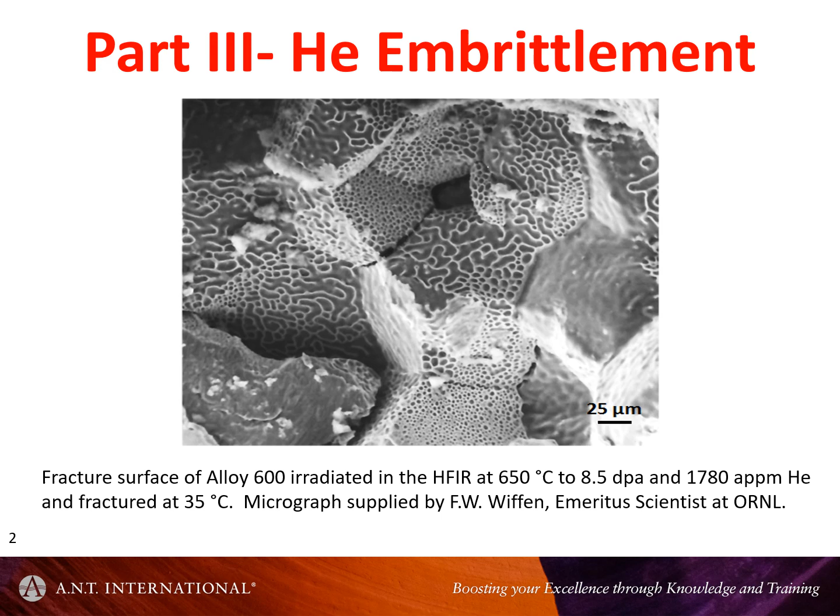Okay, so here's an example of helium embrittlement, from Fred Wiffen, Oak Ridge. Nickel alloys are particularly prone to helium embrittlement because they contain nickel. And nickel in a highly thermalized reactor will produce a lot of nickel 59 from the most abundant isotope, which is nickel 58. And nickel 59 is a very unusual isotope in that it has a very high cross-section for helium production, as well as protons and hydrogen production, and then gamma reactions. So on all counts, getting nickel 59 produced is not good. Fortunately, it kind of saturates at around 3% of the total, depending on the burn-in and the burn-out rate and what the spectrum is.

So when we discovered we had a problem with Inconel X750 spacers, one of the reasons I was particularly interested is because when I was just starting at AECL as a young person, I was given the job of doing a surveillance assessment for some flux detectors removed from a CANDU reactor. Ultimately, many years ago, flux detectors were exposed to moisture from the vault, and they realized that this was bad because you'd get nitric acid being produced with all the gamma radiation around, and early flux detectors in CANDU reactor designs were failing because of nitric acid attack. So then they encapsulated them in helium-filled tubes that went right through the reactor.

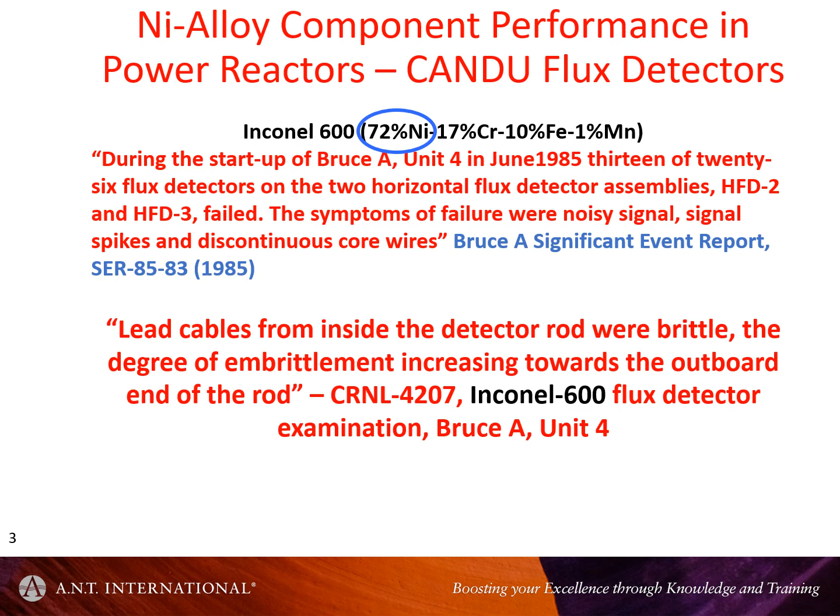But even then, after about 5 or 6 years, they would break during startup, and ostensibly you could just replace them. But just by routine, there'd be a bit of a surveillance examination just to make sure it was nothing unusual. But it was unusual. These things were very brittle, and you couldn't attribute it to nitric acid attack. So that was my first introduction to the peculiarities of Inconel components.

So the CANDU reactor runs on natural uranium, has a very high thermal flux because of that, and therefore can operate and generate fission. And neutron economy is very important. So anything which is nickel or steel in the core, even though the calandria vessel itself is stainless steel, anything in the core is minimized. The amount of mass in the core is minimized. Springs are tolerated because nickel alloys are good springs. And flux detectors are also tolerated because they can be taken out after a short while. They can be easily removed, but they'd only last for 5 or 6 years.

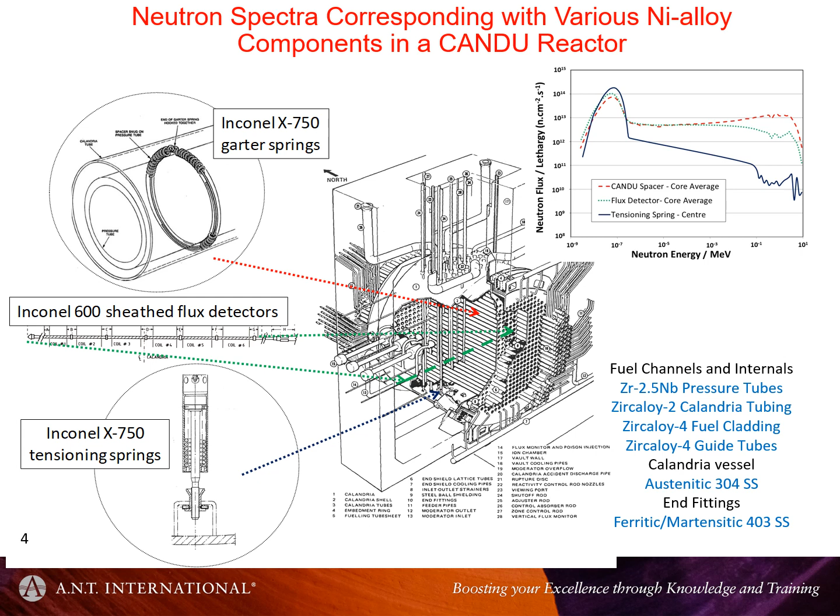At the edge of the core, there are these tensioning springs, and that's another story. They have some very interesting effects as well. So what I saw when I just started work at CNL was that, being responsible now for the surveillance program of these flux detectors, it was very clear that there was something to do with the temperature. So basically they were encapsulated in a zirconium alloy tube, but obviously the helium gas was released at some point. It's funny, being helium,

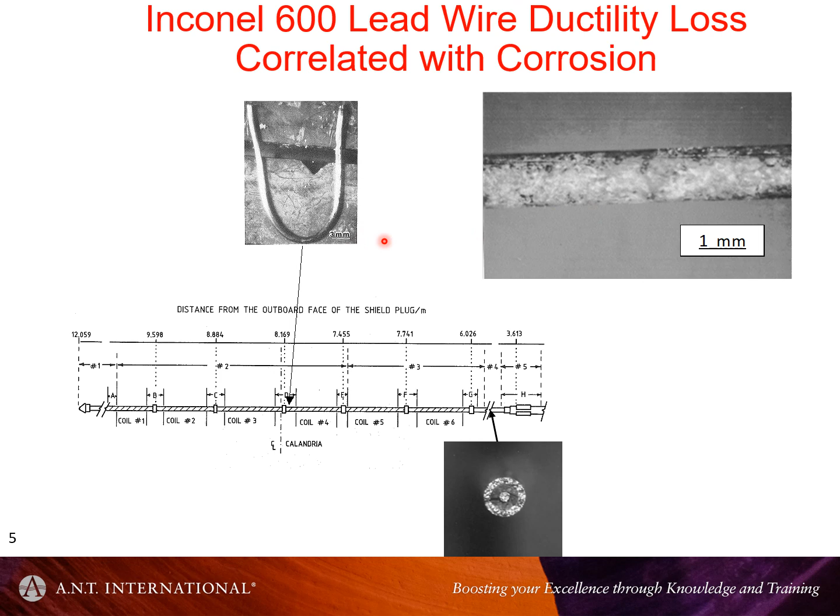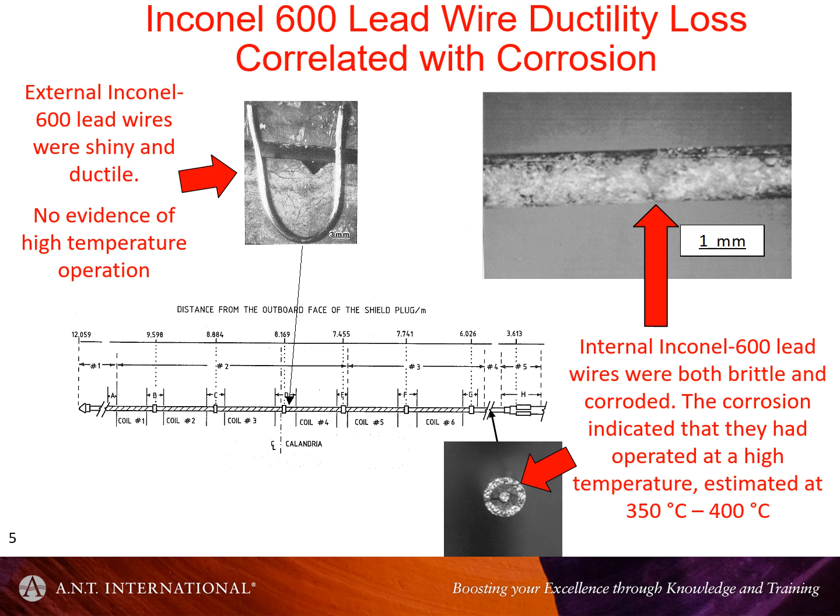but also they just leaked out, replaced by air. Air is not as good a conductor, and these things got hot. And what I saw is they were very brittle in regions of the reactor where there was a lot of mass concentrated, a lot of temperature, and they corroded as well at the same time. So it turns out the corrosion layer was itself very odd. But the components which are outside of the rod, but also at the peak flux in the middle of the reactor, were quite ductile. So in that case, it seemed like it wasn't an irradiation effect. It was something synergistic with temperature, and clearly temperature was very dominant.

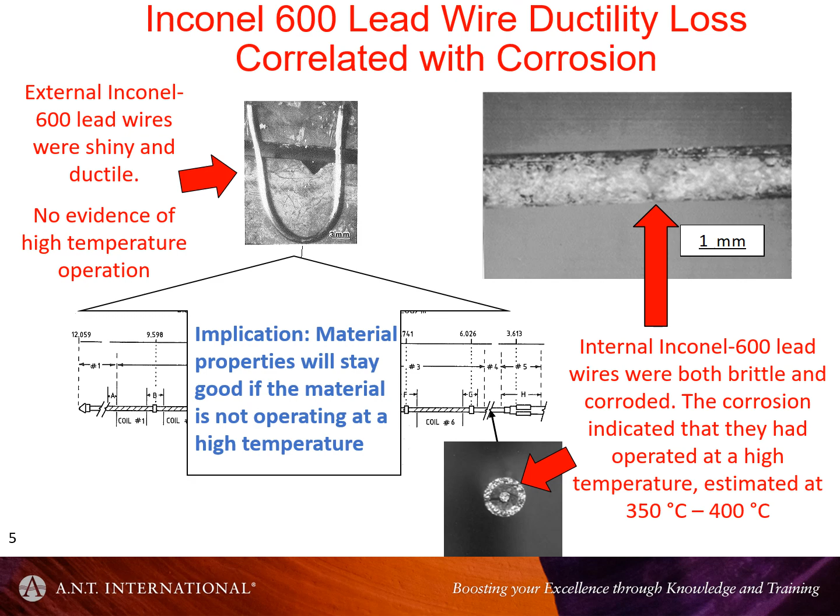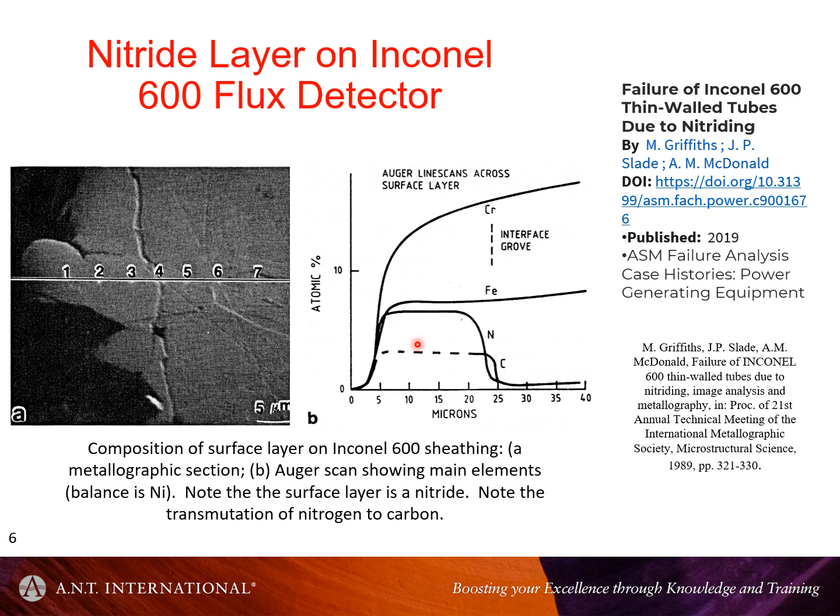So the implications were the material properties would stay good if it weren't operating at a high temperature. I mentioned there was a corrosion layer on these detector components, the Inconel 600 in this case, where they were hot, and it was a very high nitrogen layer, so you're reacting with the nitrogen in the air. What was interesting is also this carbon layer mixed in there, and that comes from the transmutation of the nitrogen to carbon. So one of the things that was clear is where the properties were bad, where these things were very brittle, there was this thick layer.

And being naive and young, I said, well, okay, it's brittle where you have nitrogen layers. So we wrote a paper to do with the embrittlement due to nitriding. The idea was that the brittle layer would crack easily because it can't deform, and you've got this high stress if you bend the thing, the outer fiber stress in this layer, and if the crack intersects with a grain boundary, it will then progress further. Again, this was a bit of naivety, but I didn't have much money to proceed further and do an in-depth study. Certainly didn't have the facilities to look into this in more detail, although I wanted to, but nobody was interested.

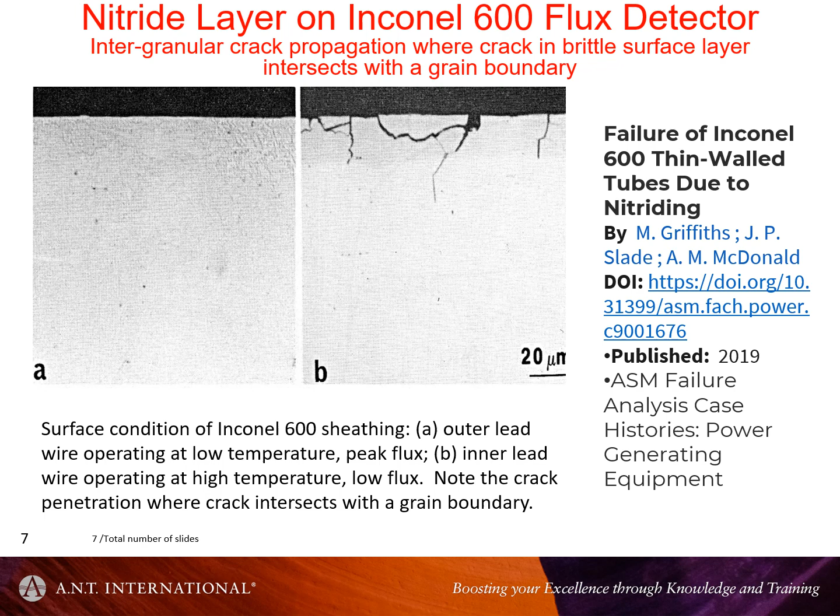So this relationship with cracking of components has been popping up quite a bit. It also happens in PWRs. Another Inconel 600 component, there was an operational experience report back in 2006, where a flux thimble was being pulled out of the Surry reactor, and the report described it as shattering into 6 pieces. Very interesting.

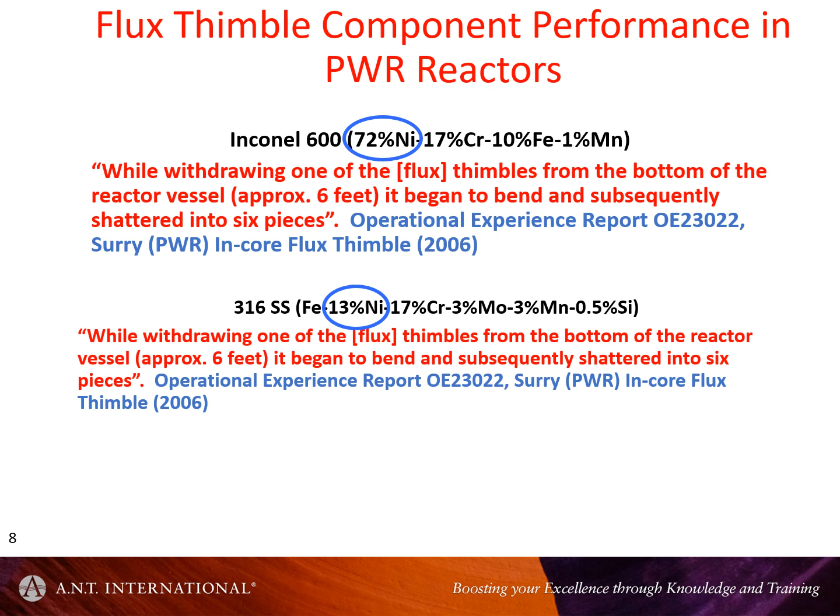More recently, in the 2000s, people have been studying 316 stainless steel tube. What was observed, this is some work by Fujimoto and Edwards. They actually did do some TEM, and they were able to show that there were bubbles concentrated along grain boundaries, and corresponding with that, there was some embrittlement, some intergranular failure. Now, they're still kind of cautious about attributing that to helium, but they said it could be.

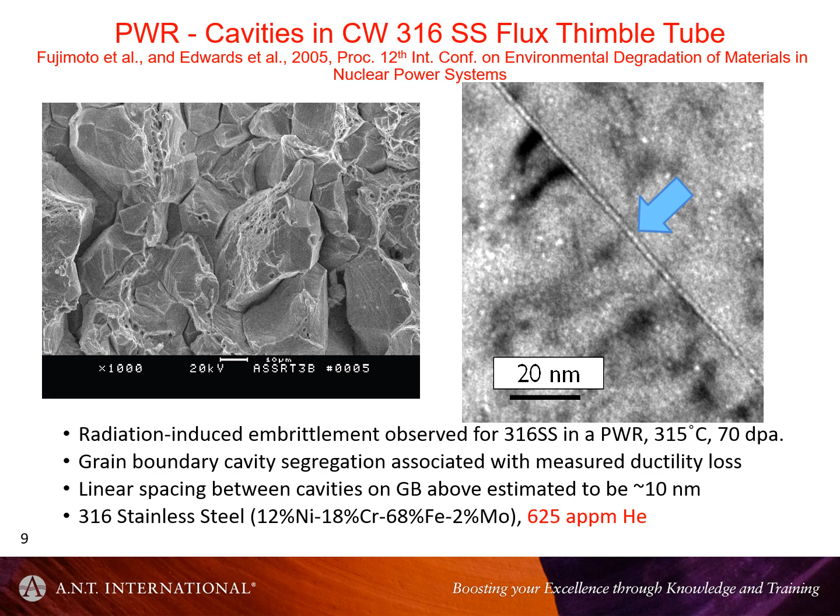At that time, this was the first instance where somebody had observed very small helium bubbles, certainly segregated at grain boundaries, in a PWR environment. So this is stainless steel. It's only 12%, 13% nickel, so you don't get an awful lot of helium. Plus it's a PWR spectrum, so it's not like CANDU, but enough to get this segregation. And people hadn't noticed it before in any other previous TEM studies of stainless steels.

And Danny Edwards at the time kind of attributed this to the fact that people hadn't defocused the TEM. To me, that was kind of an odd thing to attribute the lack of observation to, because having spent tens of thousands of hours in an electron microscope, I know for a fact that you're defocusing and focusing and over-focusing left, right, and center whenever you're trying to find that focal point. So this should have been obvious in many cases.

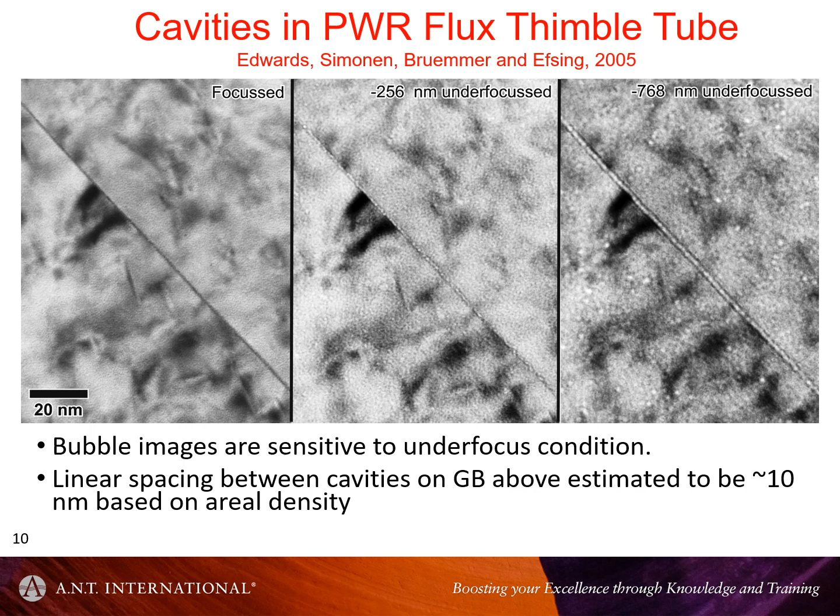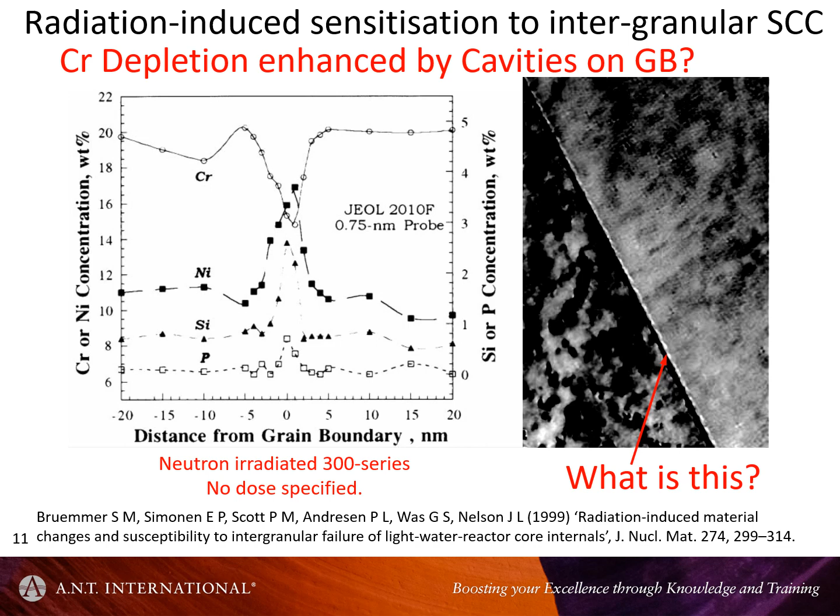And then it became apparent to me, when you look at that, and then you look at other past observations, in this case some work by Steve Bruemmer, and you look at the images that went with chromium depletion at grain boundaries, you have to be scratching your head and say, well, what is this? It almost looks like you have a string of helium bubbles, just like the Danny Edwards case, along the boundary. Doesn't look right. It looks like it's shifted somewhat, and the contrast is peculiar. But again, if you're familiar with electron microscopes, shifts in images depending on the height are okay. You expect that, and the thing to do is to align the microscope well.

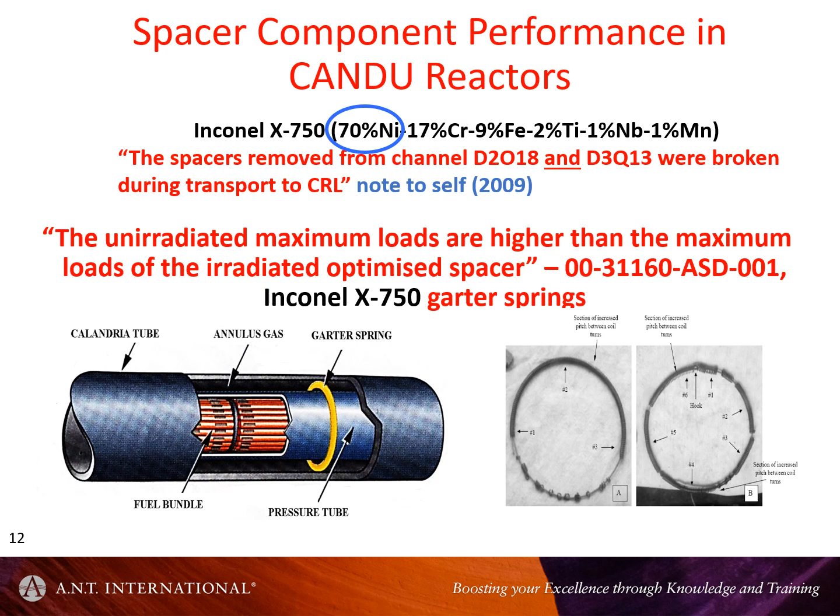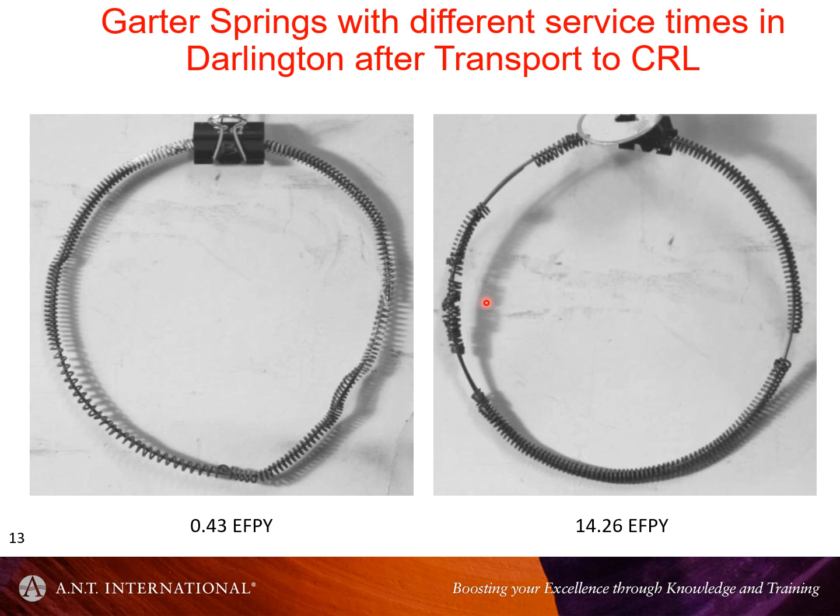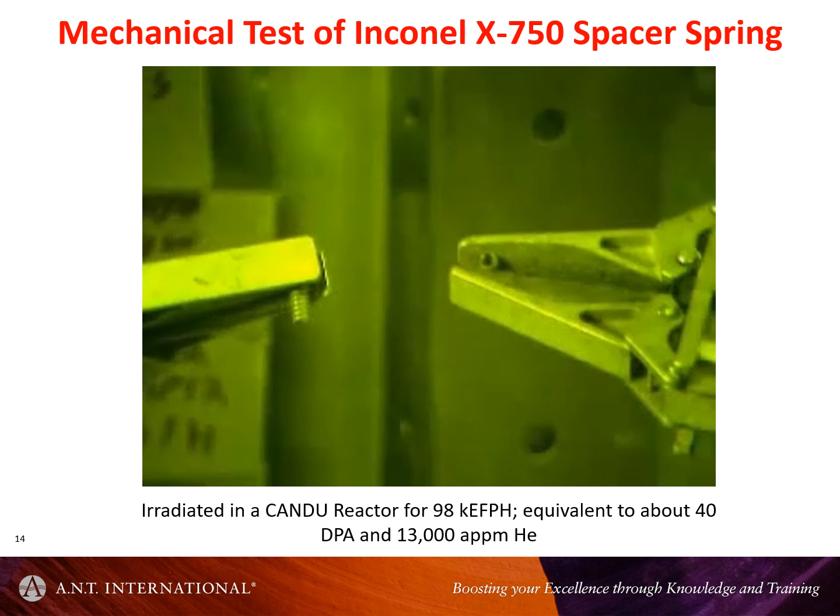I mentioned that in the late 2000s, we had these problems with spacers, and what we were seeing was that when the spacers were removed from service, they were coming to the lab in bits. This is an Inconel coiled spacer. It gets damaged in transit, banged around, but even though it's been irradiated, in this case about 1 dPa at that time, just a bit more, it's still ductile. It's only after a very high irradiation or much longer time in the reactor that it becomes very brittle. Take a piece of this in the cell, and it just shows you how easy it is to break. So something is embrittling them, obviously helium.

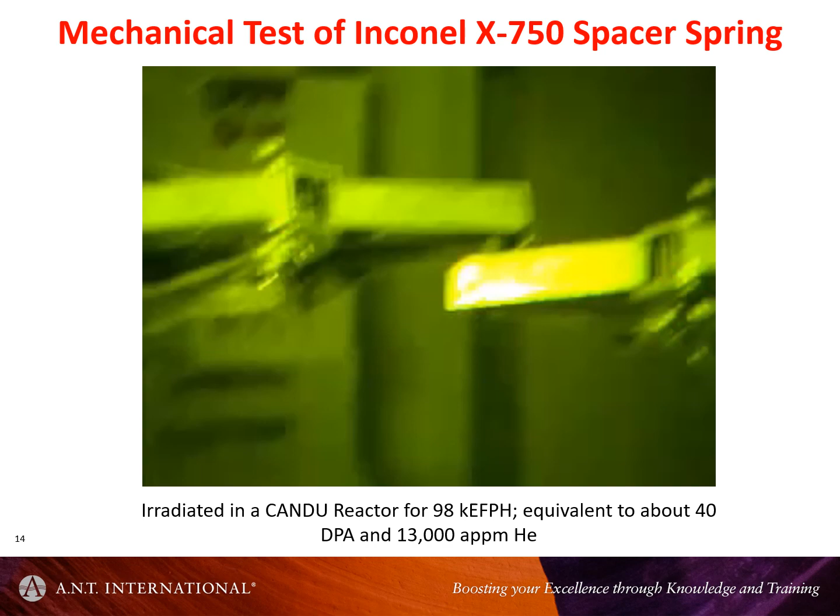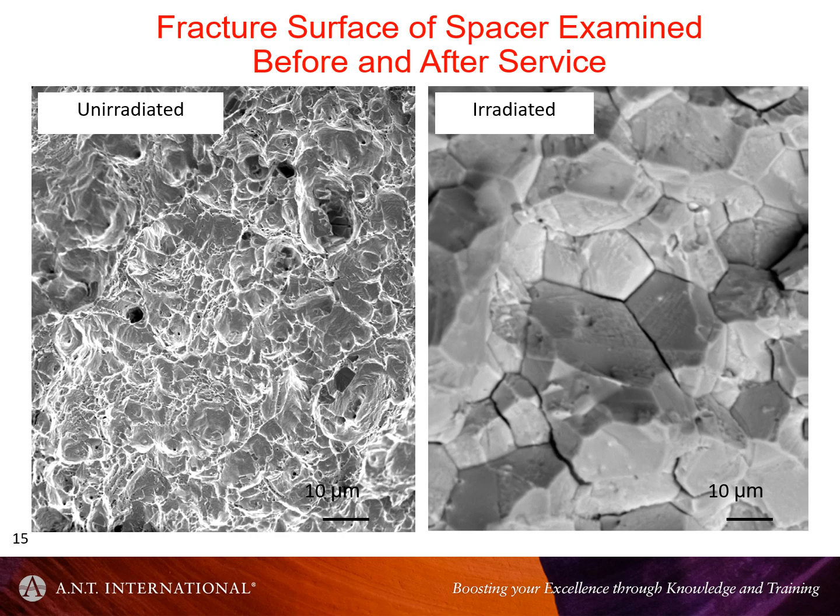When the material failed, I mentioned they failed along grain boundaries. So you had this classic intergranular failure of these spacers irradiated for a long time, whereas they would be ductile if unirradiated.

One can summarize the properties of these springs from results of crush tests. Their role, their function in the reactor, is to hold up the fuel channel. So long as they can withstand the pressure from the fuel channel, that's okay, as long as they have enough load carrying capacity.

What we're seeing, if you look at the unirradiated material, is the load displacement curve. When it's irradiated to about 5-6 dpa, the strength goes up and the ductility drops a little, as you'd expect. But with increasing dose, the strength goes down a lot. This is a big concern for the CANDU industry, because will it keep going down?

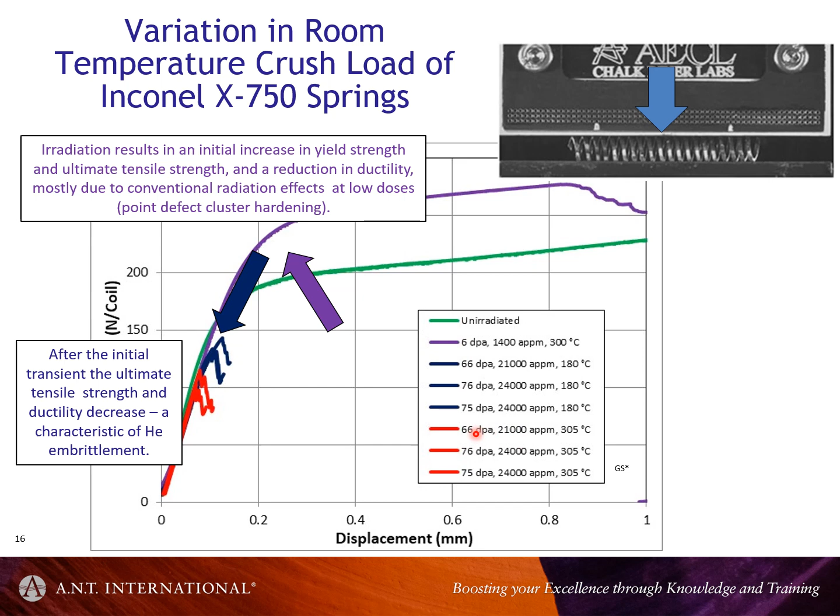The other interesting thing is that there's a temperature difference. I mentioned the flux detectors had this apparent temperature dependence of the embrittlement, and it seems that was probably not nitride cracking, but really helium embrittlement. What you see is that at a higher temperature, shown in red, the embrittlement is worse compared to the lower temperature.

Irradiation results in decreasing strength and ductility with increasing dose, and once you get past a certain low dose, the degradation just keeps dropping, as you see here.

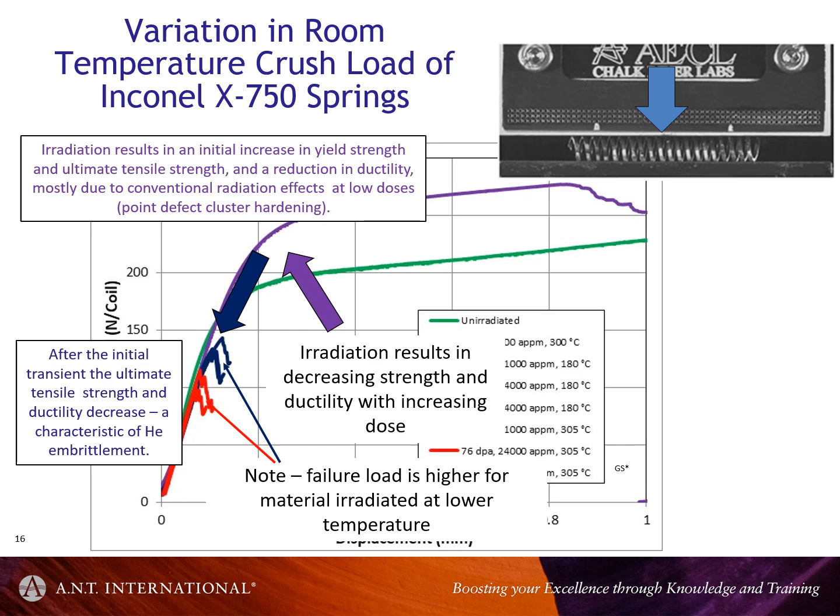One of the things I did as a program manager at Chalk River was say, well, we must do some TEM. We didn't have any sophisticated FIBs at the time, but we did have electropolishing equipment, and very good technicians who built a twin-jet electropolishing setup to polish these 1 millimeter wide sections of the spacer.

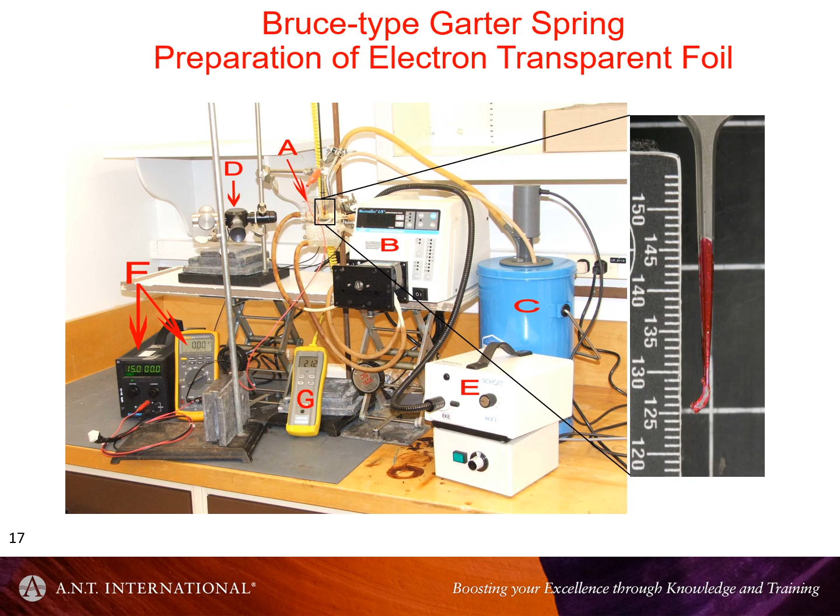I mention this because I was in my office one day when the guys had prepared the samples, and they called me over because they said, what you thought you would see, we don't see it. I had some young people just starting out, with no experience on the TEM.

They were quite mocking, basically, when I came over, saying you don't have the bubbles on the grain boundaries. So I said, let me sit down. I spent half an hour aligning the microscope, and then produced these two images here.

Basically, you've just got to align the microscope. The difficulty, and why people often weren't seeing it in the past, I think, is because they didn't have the microscope aligned. One of those young chaps, or a couple of them actually, went away and published this later without giving any acknowledgement to the fact that I was the one who aligned the microscope for them and took the pictures.

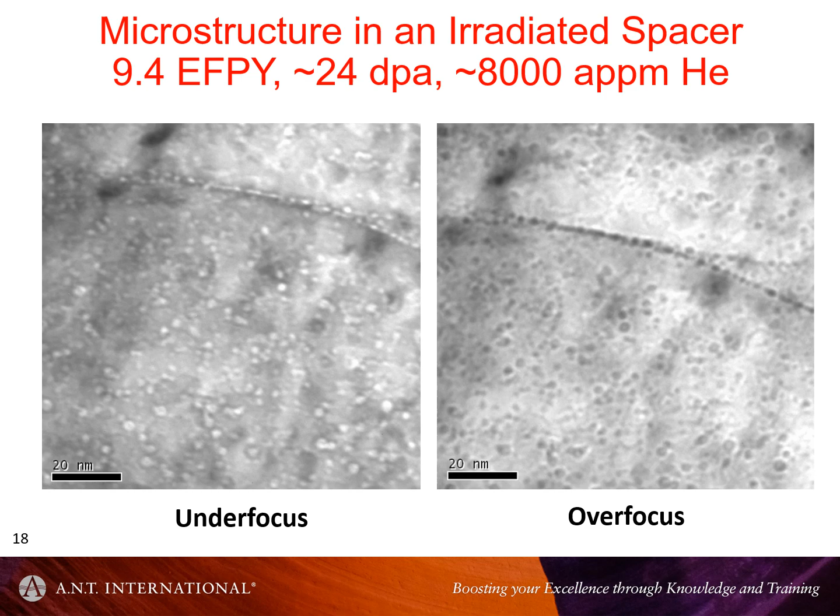Anyway, why is this important? Well, it's important because if you have a material which is swelling like this—this is from self-ion irradiation, where you get lots of swelling for whatever reason, we don't have to understand why.

Typically, the boundaries are cavity-free, void-free, because vacancies are simply absorbed by the boundary, and then they can diffuse wherever they want or combine. You don't get cavities segregating on the boundary when there's no helium there, but when there is helium there, you do get lots of segregation, and that's one of the features of helium.

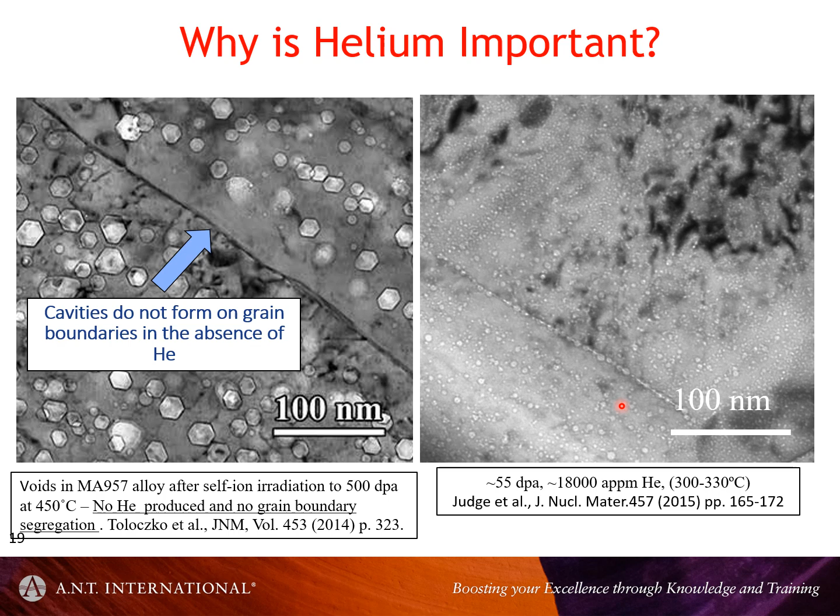It gets to the boundary, and there it stabilizes any vacancies which can also make it to the boundary, and you end up with a higher density of cavities, or bubbles in this case, at low temperature. They're perforating the boundary when there's helium present. So cavities do not form on the grain boundary in the absence of helium, but helium does stabilize bubbles on the boundary.

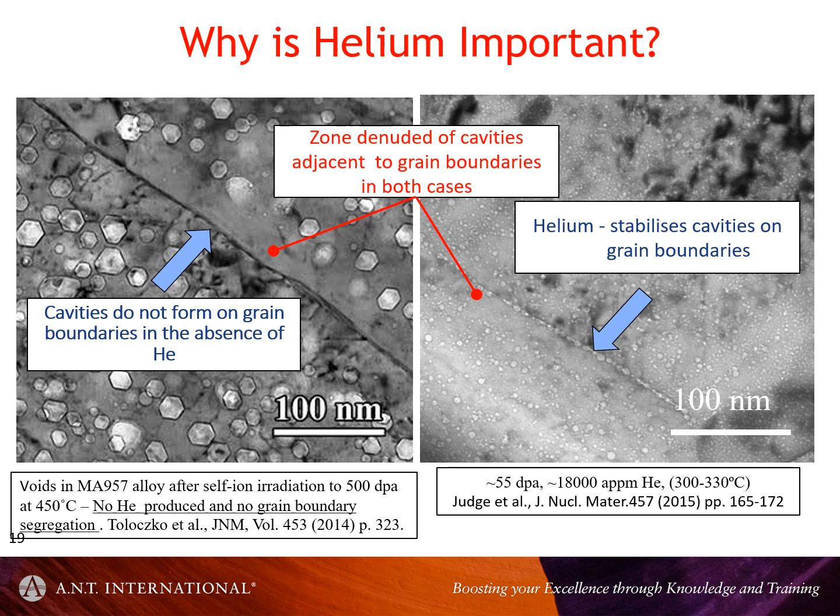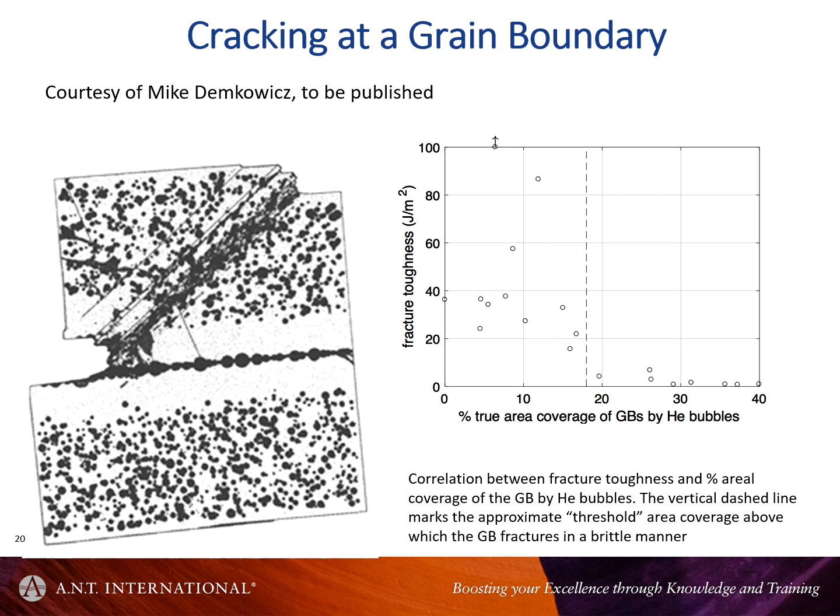That's the point where the thing would fail. So what happens? Well, if you have a bubble-free material and you have a crack, in Mike's simulations he showed that basically the action of slip on a ductile crack is that the crack can grow, but mostly outwards, and it's also blunted, so you don't get this stress intensity—you get an actual blunting of the crack, which tends to diminish any further advancement because you don't have a sharp edge.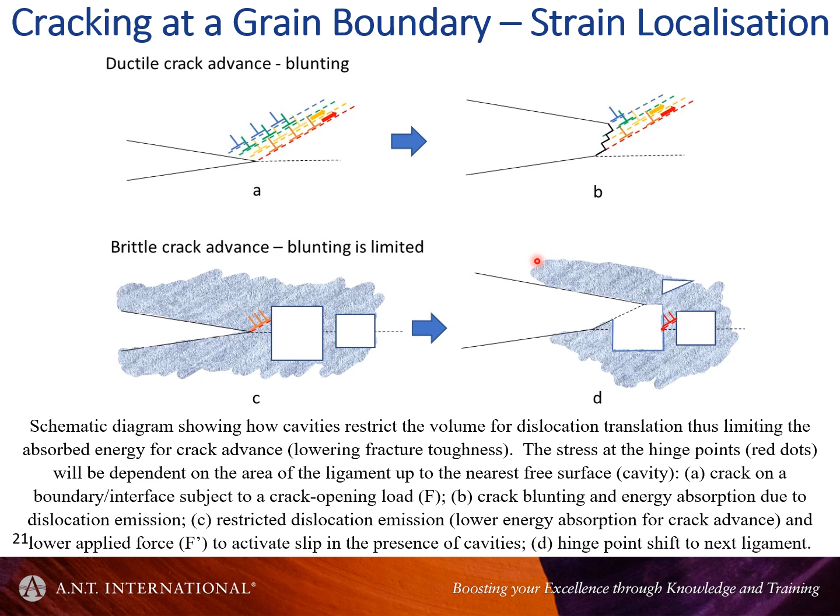However, in the case of bubbles, if you have a sharp crack with a bubble immediately in front of it, the dislocations can't go very far before they intersect the bubble. Eventually they'll slice off the bubble, but then you're creating a hinge arrangement here, and one can speculate that perhaps this sort of thing is happening, and that's why you get brittle failure when there's a lot of bubbles on the boundary.

So one can hypothesize about how things progress if we look at the true stress, imagining hypothetically in the spacers, and a dose without defining what that dose is. Normally at zero dose, you have a certain yield strength and a certain ultimate tensile strength, and the grain boundary strength typically is much higher than either of these. So that when you deform, and even at low doses when the material's hardened, it'll generally fail in a ductile manner, as it does in our spacers, even at low doses. But if you increase the dose, it might yield and then fail in a brittle manner.

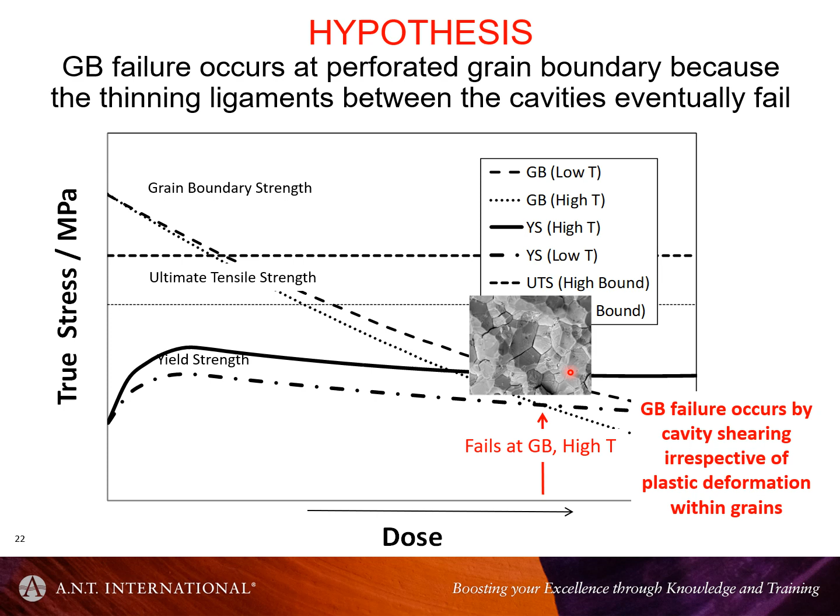And ultimately, and this is where the million-dollar question, or billion-dollar question comes in, is what happens at very high dose? Does it just fail in a brittle manner? And it kind of looks like that. So the powers that be in Canada, I've worked at Kinectrics, and we've been working on modeling to basically derive a model for the accumulation of bubbles on the boundary, and from that to build up a predictive capability for how long it would take before we get to that zero fracture toughness condition that Mike Demkowicz was able to establish.

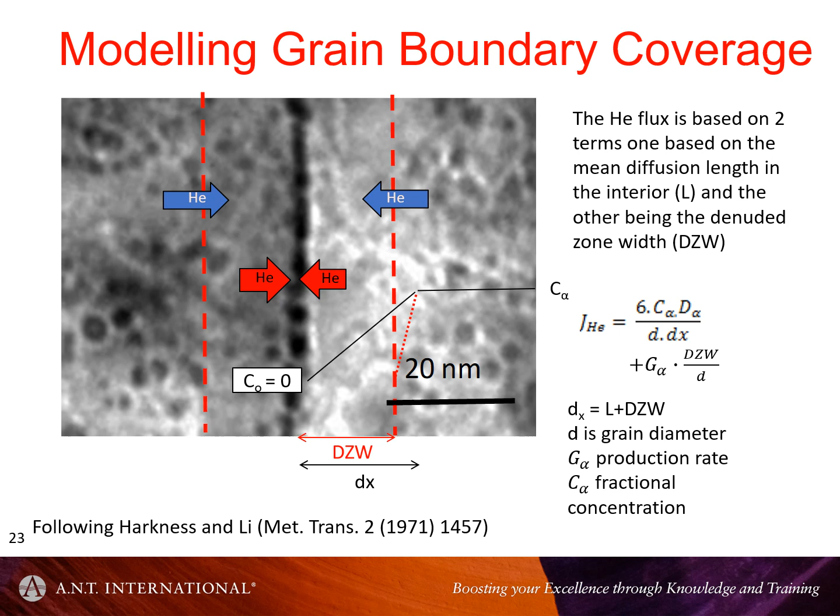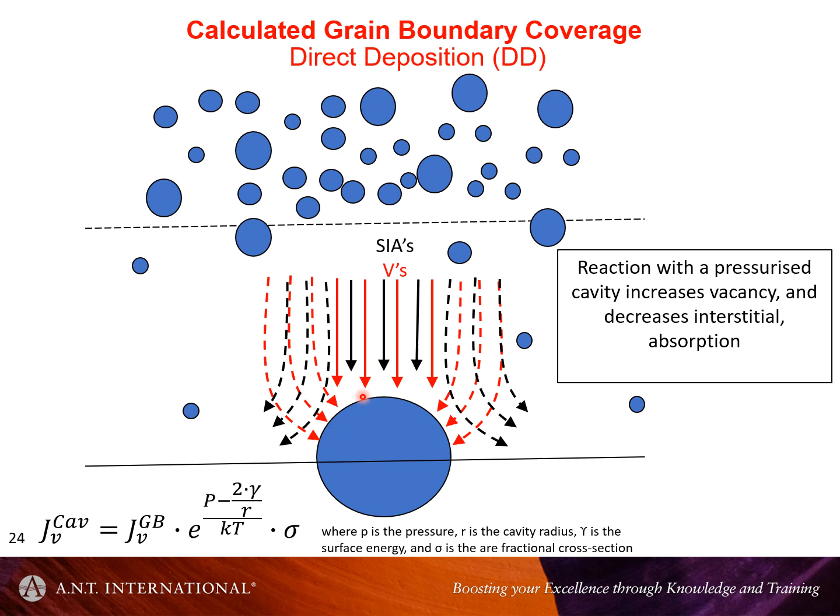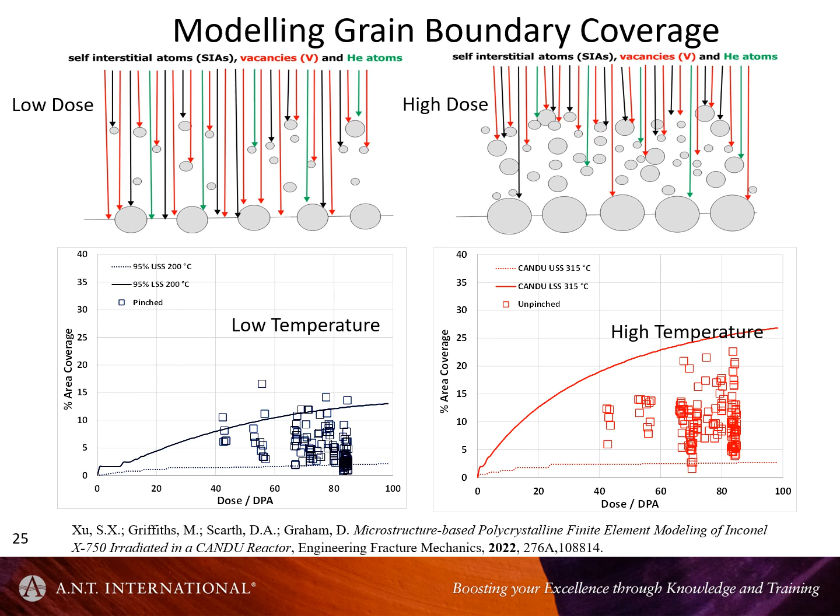We use conventional rate theory expressions for the flux to the boundaries, and also take into account the pressure and the surface energy of bubbles. And ultimately, the principle is that you're always getting point defects of all types to the boundaries, and at low doses, there's not many bubbles in the matrix because you don't have enough helium generated to interact with this flux of point defects. And at high doses, this shuts down. So the good news is that from the point of view of the modeling, and of the reactor operators, the rate is dropping with increasing time. So the modeling at least shows that it's not going to be an accelerating effect.

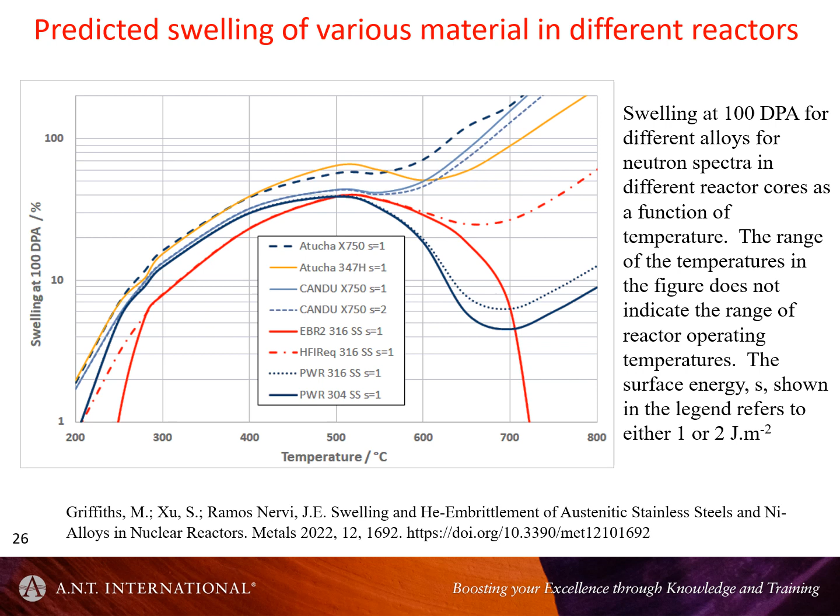In order to determine what this means, how do we model it, one could model the swelling in the matrix, and applying the same type of model, this is what the swelling would give for different reactors in different materials. I'm just putting this up to illustrate that I've gone through the actual process of trying to model it. But this is for void swelling now, not for helium bubble production, which are two different things.

We've found that when you look at the measurements of the helium bubble production, you can deduce how the sink strength changes. And the temperature dependence, the sink strength in the matrix, is actually decreasing with increasing temperature for a given amount of helium. It's smaller at the higher temperatures, and that's because the bubbles themselves are much bigger. And for various reasons, one then sees as a function of temperature, if we consider bubbles alone, an increase in the coverage with increasing temperature. But if we calculated the swelling, assuming a bias-driven growth of cavities, which is not the case, in fact, for our reactors, which are down at this temperature range, with increasing temperature, we'd actually see a decreasing coverage. And the cutoff is around 350 to 400, so we arbitrarily put that in there, and that's when we get into the bias-driven growth regime. It comes in somewhere between 300 and 400 degrees C, depending on what one has for the cavity density, the dislocation density, the microstructure in general.

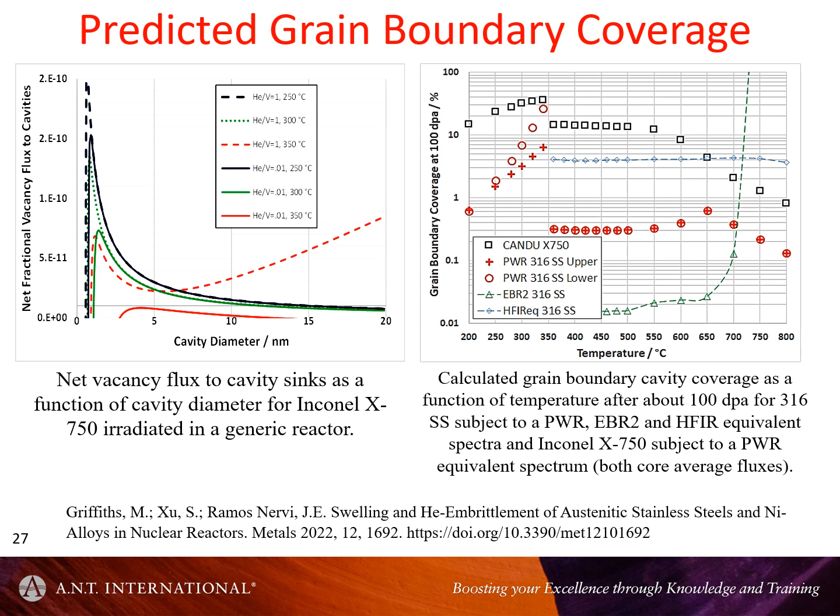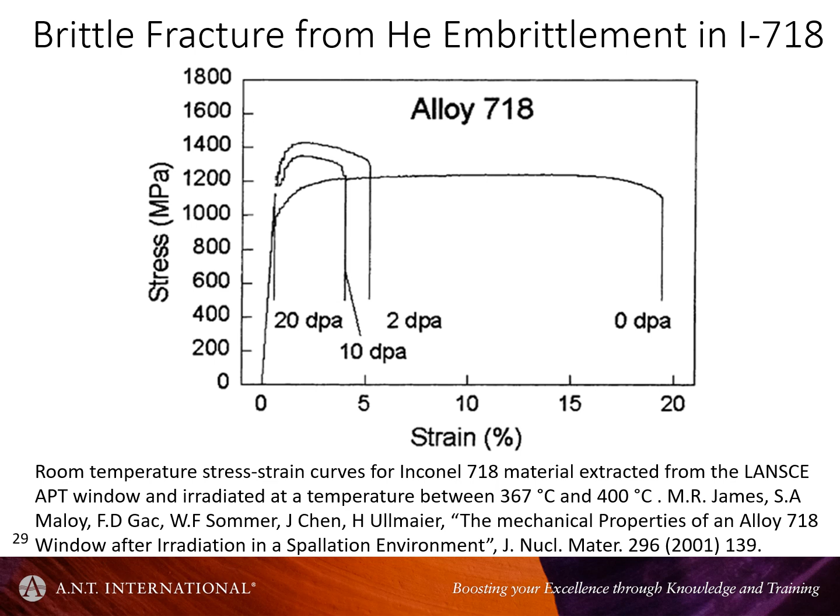I'll finish just by talking about some other examples of helium embrittlement. I showed this earlier, the Inconel 718. Here we see that the 20 dpa Inconel 718 from LANSCE is very brittle, and that's likely related to the fact that you've got a lot of helium generated.

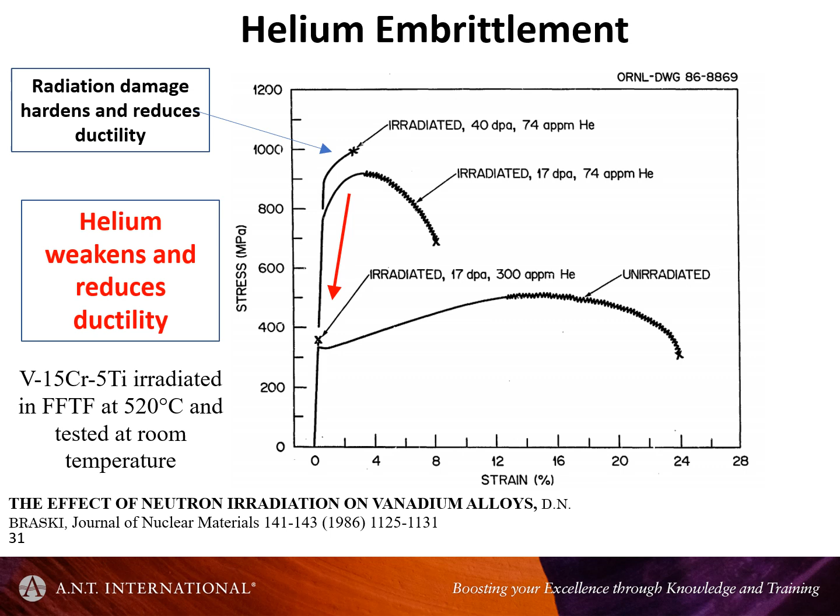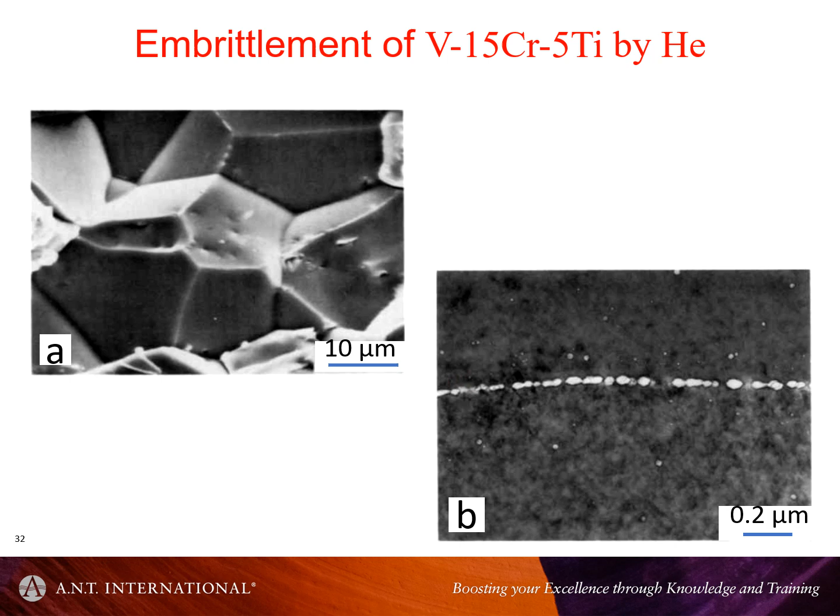The one case I do like is with vanadium 15Cr-5Ti alloy. This is some work by Dave Braski, I think. What he did is he looked at various combinations of dpa and helium at 500 degrees C, 520 degrees C. And what he found was that if you have a certain amount of helium, the material becomes brittle, and it basically fails intergranularly very easily, and that's because you have a high density of bubbles on the boundary. Basically, the failure is in the elastic region.